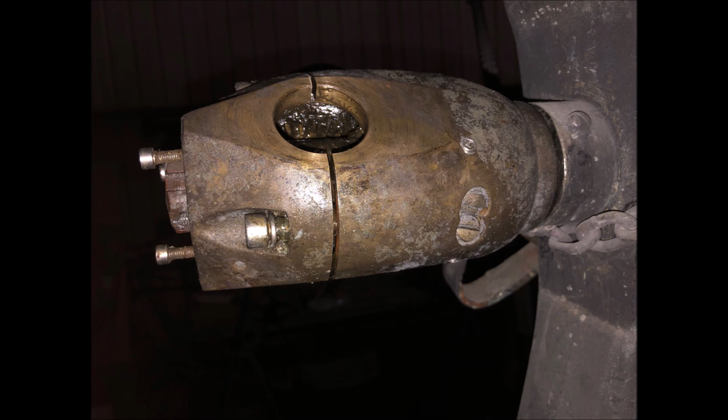Okay, quick recap of what I showed last time. I refinished and reinstalled all the cockpit woodwork. I messed up the process of removing the prop, and I messed up and damaged the prop shaft threads while removing the rudder.

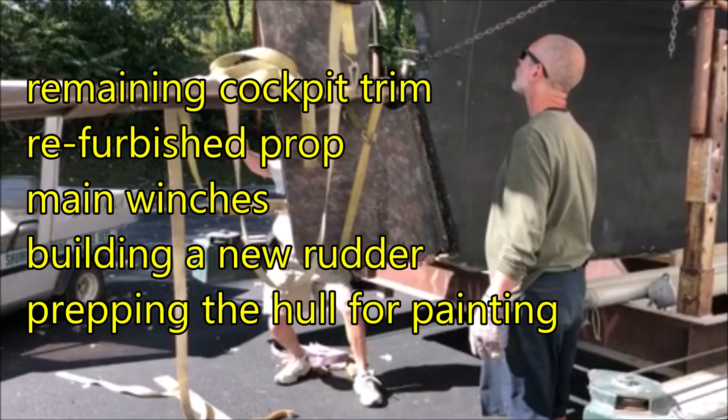In this episode, I'm doing some remaining cockpit trim. I'll show the newly refurbished prop. We'll look at the reinstallation of the main winches, and we'll spend some time on how I'm building a new rudder and why I went this route. Also, we'll start prepping the hull for painting.

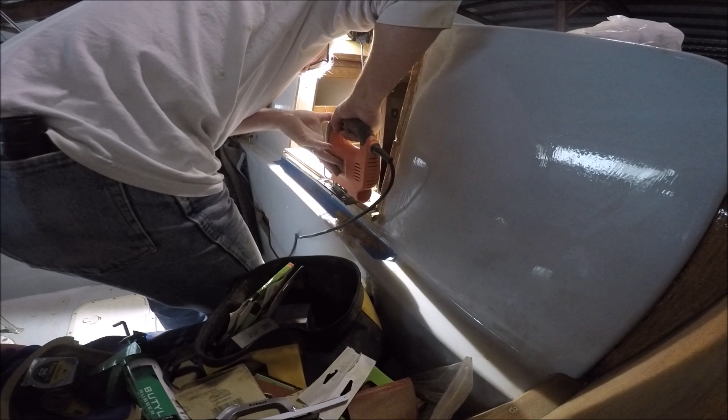Okay, on the cockpit trim, I had some help from my friend Paulo over the last few weekends, which I really appreciated. Here we're working on the companionway, making some modifications and prepping it for varnish. The outer lip of the companionway threshold had split, so I'm just cutting it back about ½ inch.

I also installed the cockpit washdown shower with a piece of old floor as the frame. The new shower housing sat deeper into the boat, so the frame really just acts as a spacer so it'll fit.

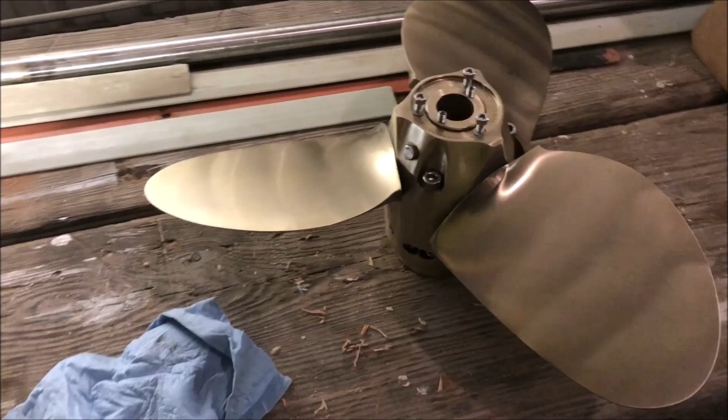As far as the prop, after messing up the removal of the prop by disassembling the hub, which the manufacturer warned specifically against, I decided to send it to a dealer to reassemble it. They did a great job of putting it back together, along with repairing the tips of the blades and cleaning it up. Looks like a new prop.

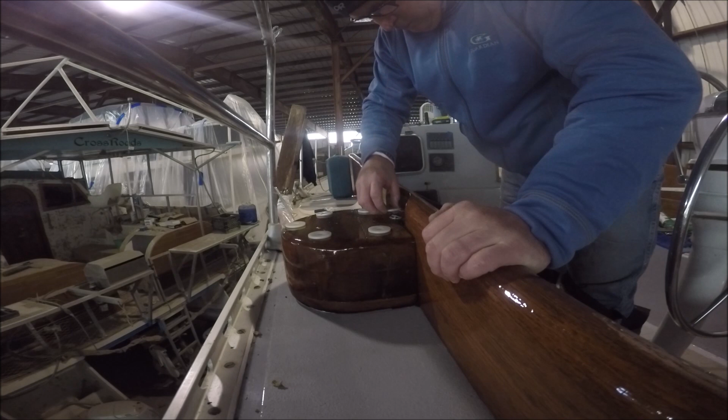The winches sit on top of a large block of teak with some nylon washers. There are 6 long, ½ inch diameter bronze threaded rods that secure the base of the winch through a block of teak and then through the deck. Most of the original threaded rods had to be cut when I removed the winches, so I replaced all the rods with new silicon bronze as well as all the nuts and washers.

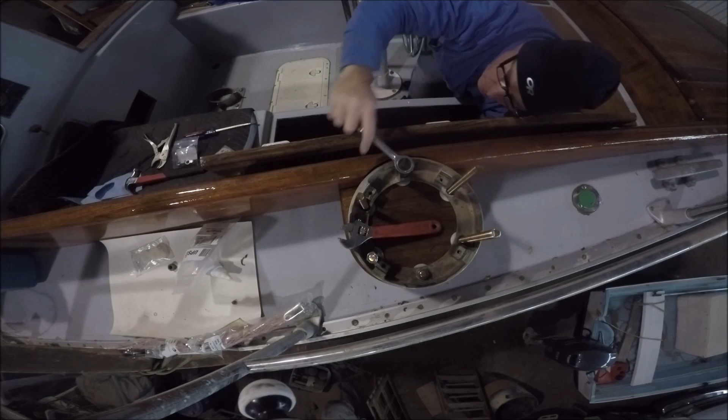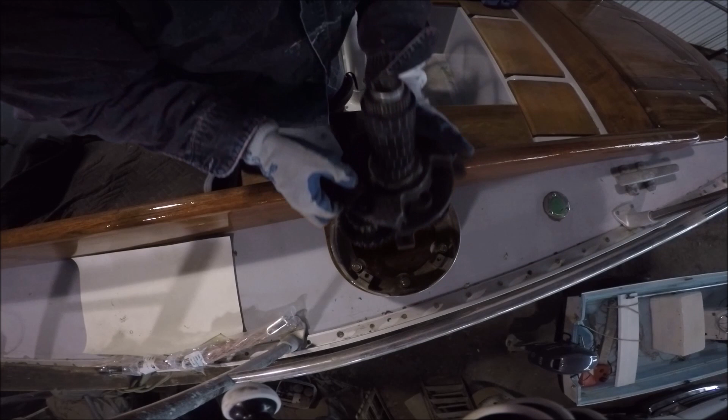I also used butyl sealant anywhere water could potentially penetrate into the block or into the boat. With the base installed, it was just a matter of sliding the rest of the winch in place. I had cleaned and greased the winches some time ago, but I'll still need to replace the pawls at some point because they're fairly worn.

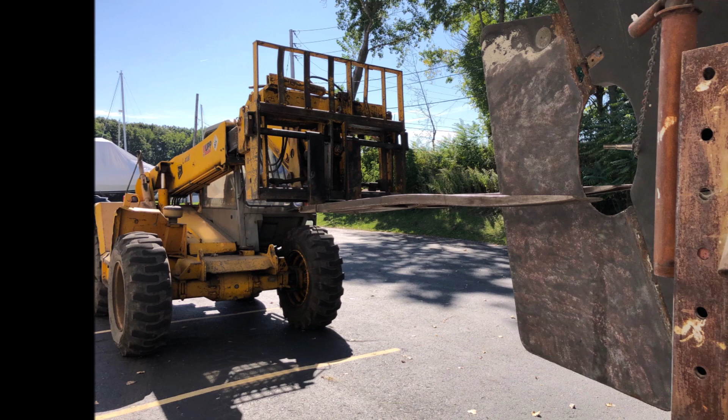Okay, so the big project I've tackled over the last few months is the rudder. Here, I plotted out the rudder profile that I'm going to use, and I'm transferring it to a piece of plywood. I did some reading on rudder profiles and concluded that the rudder that I took off, made of a flat plate of steel, had some disadvantages for maneuverability and efficiency.

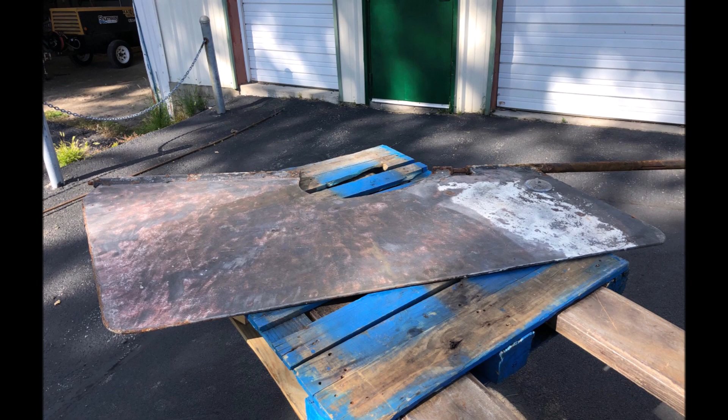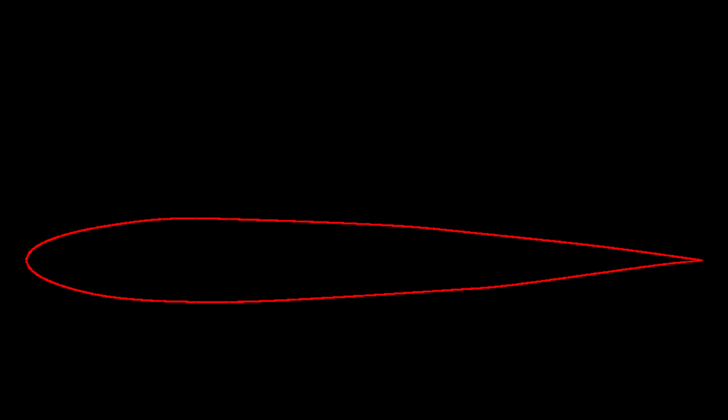It was fine if you're just sailing a straight line with the sails well balanced, but if you needed to produce some lift for turning or counteracting a bit of weather helm, then it wasn't really the best option. I ended up choosing what's called an NACA 0012 profile. It should give me good maneuverability at typical sailboat speeds without creating excessive drag.

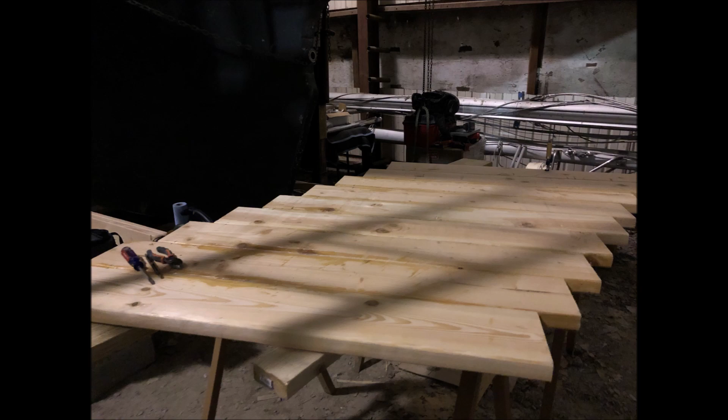To create the proper shape and act as a core, I chose Douglas fir, which is relatively strong for its weight, good in resisting rot, and fortunately it's cheap. I made the rudder in 2 halves using 2x10s of Douglas fir. The first layer here running fore and aft, and a second layer on top that runs top to bottom. This will give the core strength in both directions.

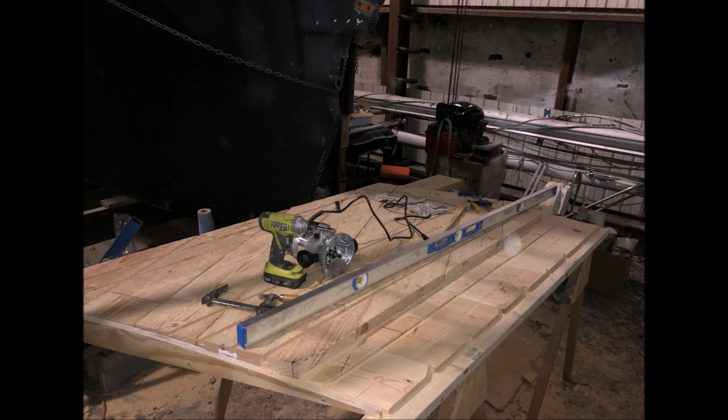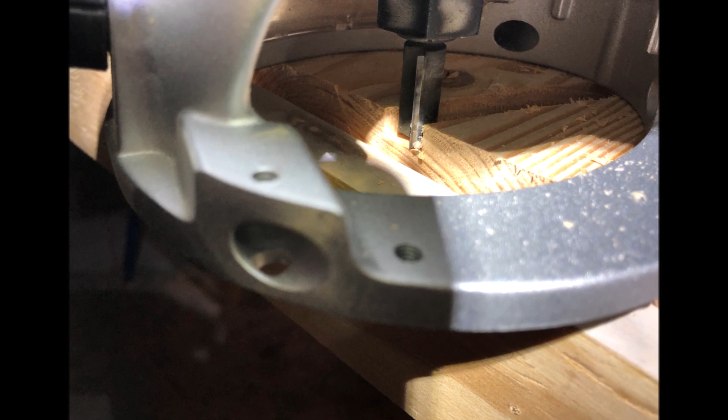Once I had all the core pieces epoxied in place, I attached the rudder profile that I had cut from plywood to the top and the bottom of the rudder. And then using a technique I learned from some wooden boat builders, shout out here to the Acorn to Arabella guys, I set my router to just above the profile shape and created a groove across the width of the rudder. Then I could just use a power planer to quickly remove the wood until the groove disappeared. That way I knew I was close to the profile without going beyond it.

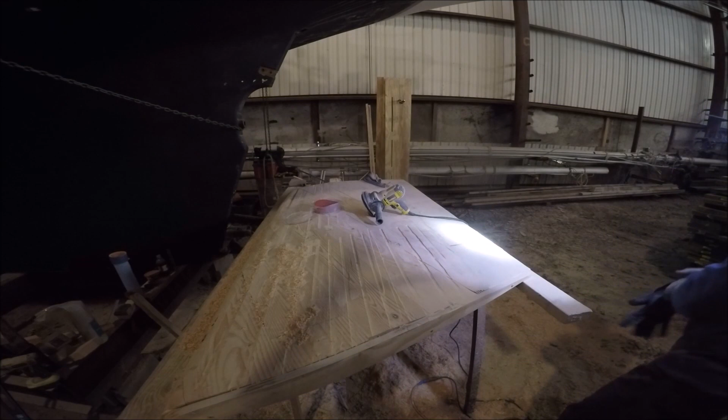Well, this worked great for removing the bulk of the extra wood, but I needed to make what I'm calling a bridge to get closer to the finished profile. I set the bridge a fixed distance above the surface and then routed much closer to the finished profile. First, I used a very aggressive rotary sander to take out these grooves, and then I switched to a random orbit sander to get a more even surface.

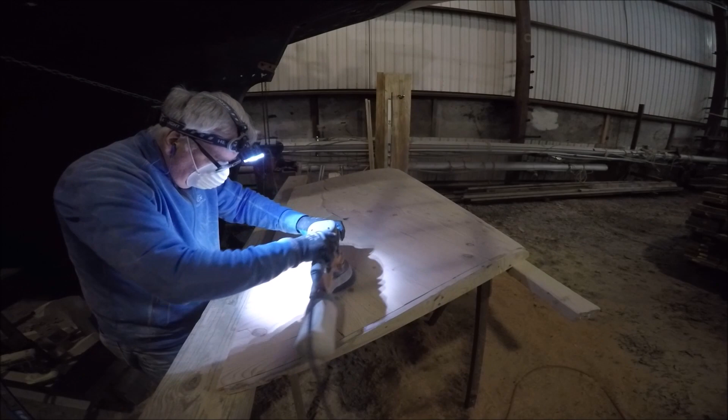Then it was time to fair the surface with thickened epoxy and sand it. I think I did this 3 times before I was reasonably happy.

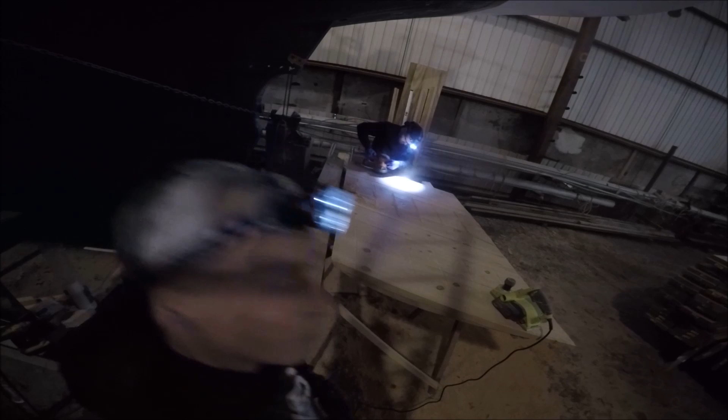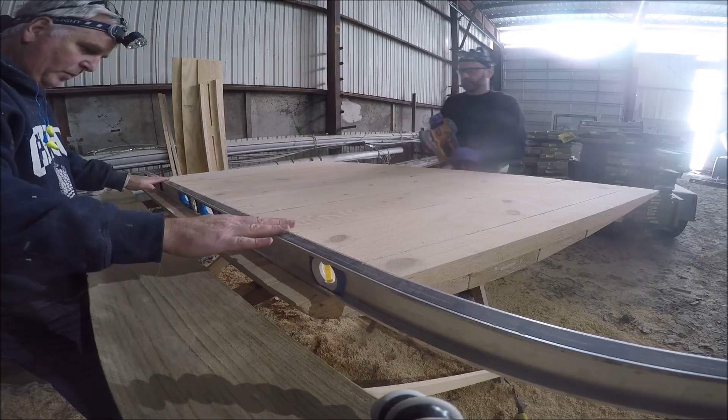Once the profile was fairly even and smooth on one half, I flipped it over and made sure that the inner mating surface was flat. Of course, it wasn't flat, so Paulo helped me here to find the high spots and even it out. This is important because I'll use this flat surface to lay out the other half of the rudder, and I want to make sure that both halves will end up mating together without any gaps.

Before building the second half, I needed to cut out the recess for the prop and another slot for a bracket. I had made a template of these areas in the previous rudder and just transferred it to the new one.

I also had some time for a little chat with the curious neighbor. Then back to work.

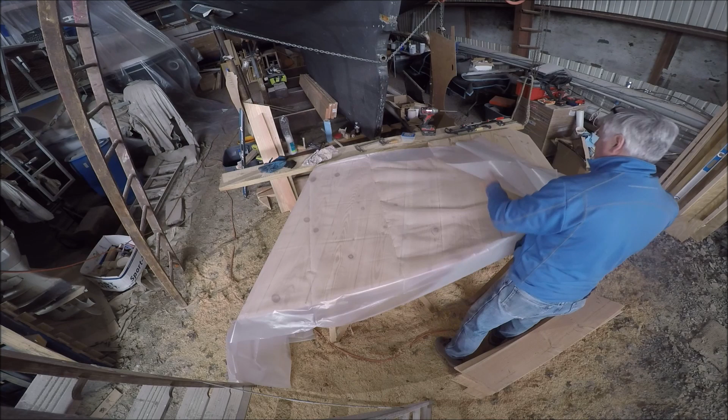With that done, I could construct the second half of the rudder on top of the first. I used a sheet of polyethylene film to separate the two halves, so that the epoxy I used wouldn't glue them together. Well, I don't want them glued together yet anyway.

The process of shaping the second half was the same as the first. Lots of wood chips, lots of dust, and fair and sand, etc. We were also starting to get into some colder weather, so I constructed a little heated tent so that the epoxy was warm enough to cure.

With both halves profiled, I needed to round off the cutout for the prop, which I had to do mostly by hand. This is to make sure that the prop wash flows over the rudder efficiently.

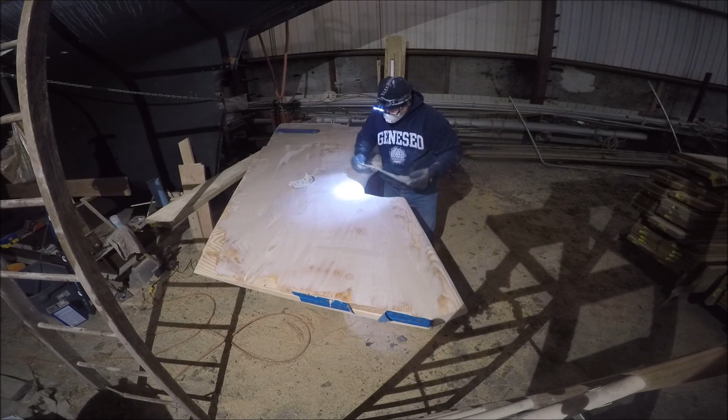Before routing out the inner surfaces to mate up with the steel shaft and supports, I needed to create registration holes. I lined up the outer edges of both halves and drilled a hole all the way through, and then used some threaded rod to keep them in place. This way, when I close up the two halves over the steel parts, everything should line up.

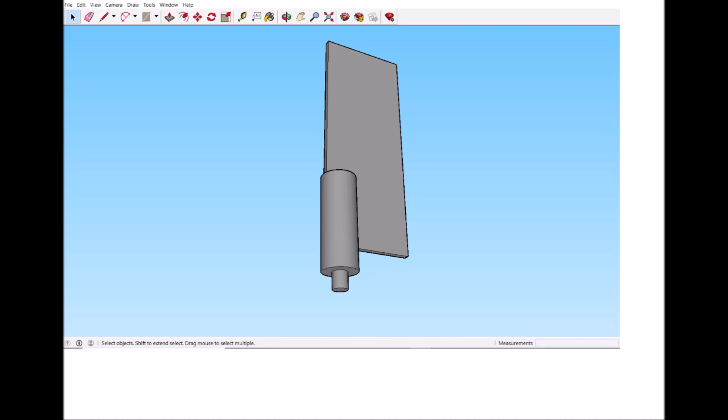The rudder shaft is also in 2 parts, one above and one below the prop, with both parts fairly close to the front edge of the rudder. The bottom part is only about 5 inches long, and it just sits in a bronze cup mounted to the back of the keel. This will support the weight of the rudder and creates a pivot point at the bottom.

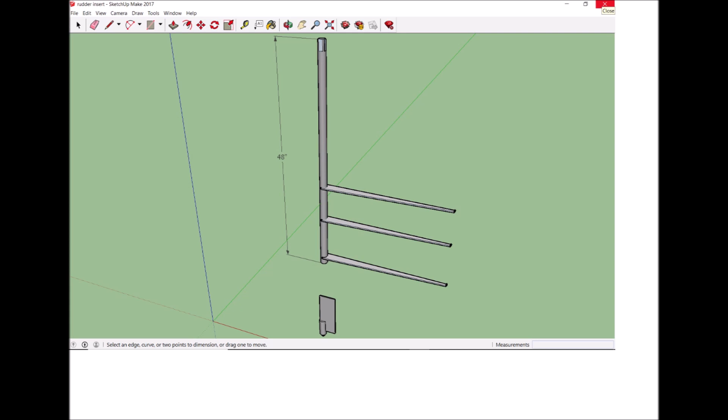The upper part is about 4 feet long and will extend up into the hull of the boat. And I'm having 3 support pieces welded to this part of the shaft that will distribute the torque of the shaft into the rudder. I'm using duplex 2205 stainless steel for these parts because it's got superior corrosion resistance even when continuously submerged in salt water. As I'm making this video, I'm just waiting for the support pieces to be welded to the shaft.

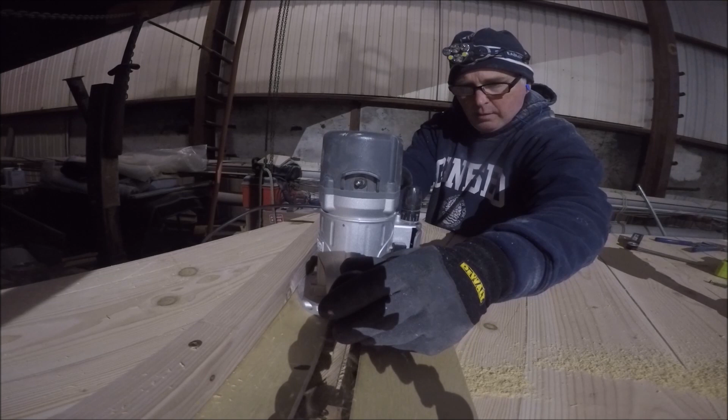I also used my router along with an angled fixture to cut the grooves in the rudder halves where the support pieces will go. Once I get the shaft and the support pieces welded, I'll epoxy it all in one half and then epoxy the two halves together. With everything sealed together, I'll then fiberglass the outside and paint it.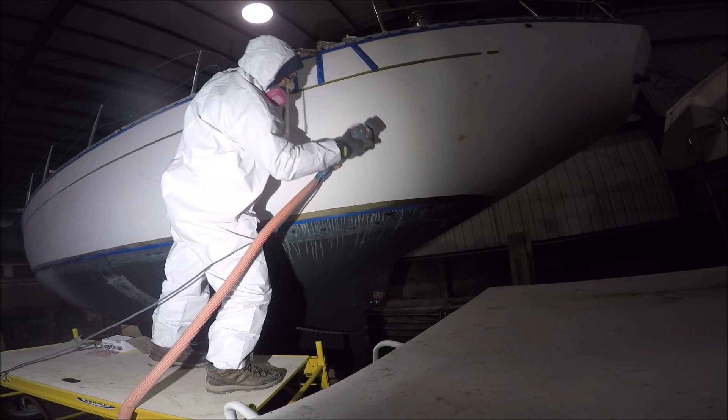While I've been waiting for the steel fabrication to be done, I decided to start prepping the hull for painting. I cleaned the topsides and filled in all the little nicks and gouges with epoxy, and then sanded it with 220 grit sandpaper. When it gets warm enough, probably around March, I can prime and paint the hull.

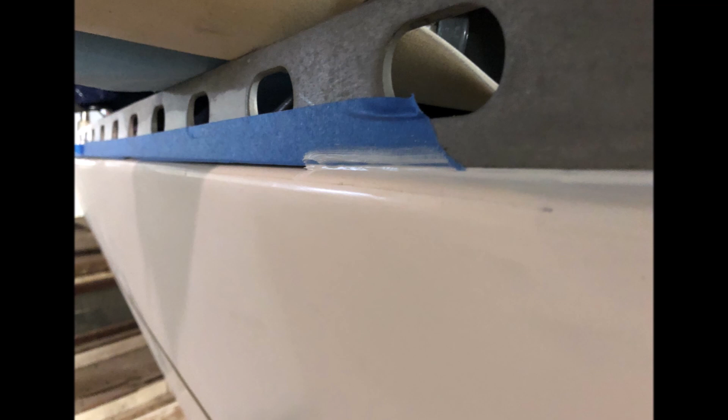I also took some time to fill in the gap between the toe rail and the hull. I'm sure the hull joint is just fine and won't leak. I just want to do this for aesthetics.

Well, that's it for this update. Next time I hope to have a finished rudder to show you, and maybe it'll even be reinstalled into the boat.